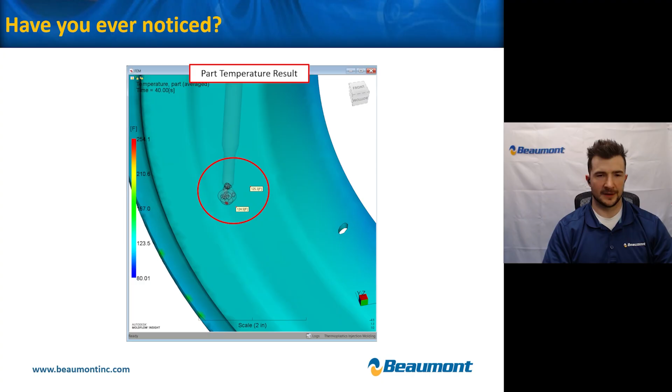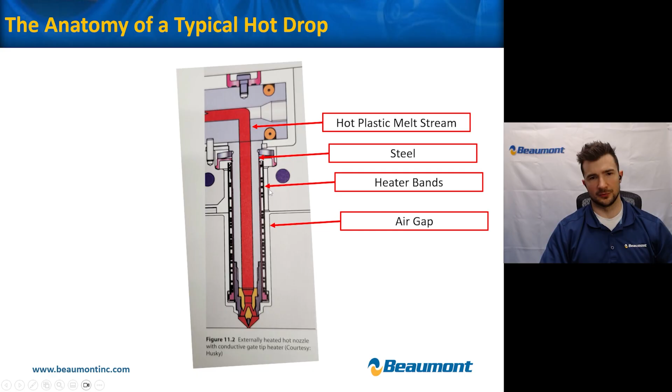So if we look at the anatomy of a typical hot drop, we've got this cross section here taken from one of our Beaumont books that John Beaumont's written. We've got the hot plastic melt stream there in red, encased in steel, and then surrounded by these heater bands. In this configuration, this is an externally heated hot nozzle, which is probably the most common configuration. There are some different options, but around that heater band, we have this air gap. So that's going to be really critical in understanding Moldflow's assumptions about the heat from this manifold and why it may or may not be considered.

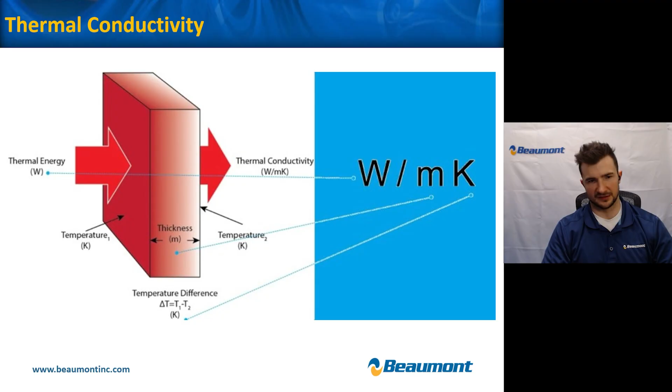So we have this air gap, and let's get into a little bit of background about thermal conductivity, air versus steel, and why these assumptions are being made. So if we look at thermal conductivity, we look at the units of that, it's watts per meter Kelvin. So what that's basically telling us is how much energy in watts is being transferred through a thickness in meters per a given temperature delta across the medium. So you've got a difference in temperature, which allows for heat transfer. You've got some thickness of material, and you've got how much energy is being transferred.

Now, the most important thing is to compare the thermal conductivity of air versus steel to understand why these assumptions are being made. So if we look at P20 steel, thermal conductivity of 29 watts per meter Kelvin, air 0.02 watts per meter Kelvin. So P20 steel is 1,450 times more conductive than air. So in comparison, air is practically a perfect insulator. It doesn't really transfer much heat relative to the P20 steel.

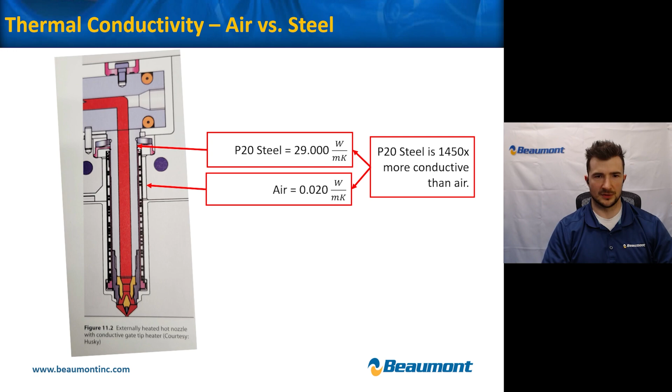So by default, given these conditions, Moldflow assumes that the hot gate and runner are insulated with a constant flux of 10 watts per meter squared. So flux is just a measure of how much heat is being transferred. So watts per meter squared. So how much energy per given area.

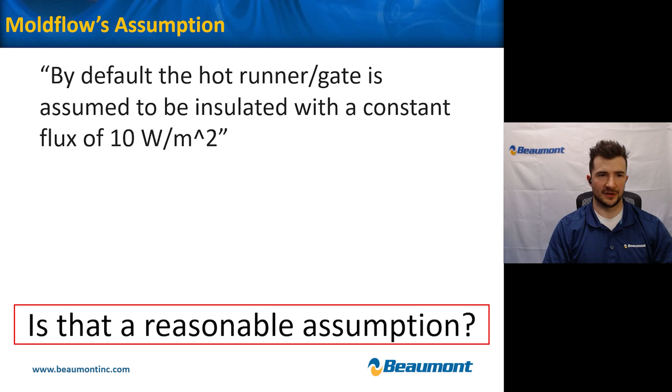So the question is, is that a reasonable assumption? Is it reasonable to assume that basically all of the heat from the hot manifold is insulated from the mold? And can we affect results if we dig into this a little bit deeper? So we need to look at some heat fluxes here to get a sense of what heat transfer is like in a couple different scenarios.

So if we look at the first image here, from the hot manifold into the surrounding steel, we've got that 10 watts per meter squared number that we discussed. So that's what Moldflow is assuming how much heat is being transferred from that hot drop into the surrounding steel. Now, if we compare the plastic part in the mold cavity to steel, we've got 9,770 watts per meter squared. So 977 times the heat flux.

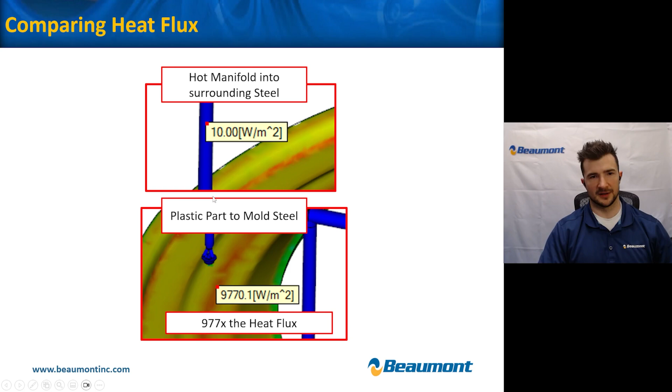So the plastic is putting a lot of heat energy into the mold steel in the areas that aren't considered insulated, but relative to the hot manifold system with that 10 watts per meter squared assumption, of course, it's a lot higher heat. So the question is, what about the gate?

So if we look at that same cross section of an externally heated hot nozzle, we see that air gap coming down, but eventually we see that that actually stops and we have hot plastic making contact with steel. So the question is, doesn't that put some heat energy into the mold? Isn't that going to heat that steel in that area? And shouldn't we see that in some of the cooling results or simulation? And if we do get a hold of that heat, does that affect our results? Does it affect warpage? In particular, does that affect cycle times within simulation?

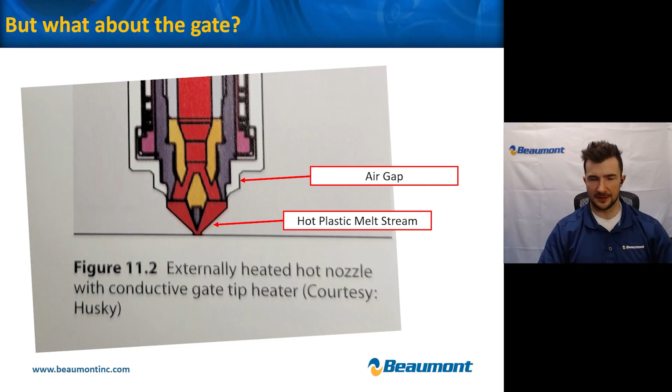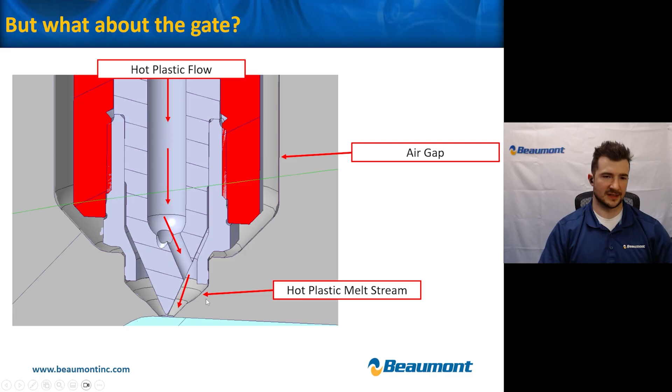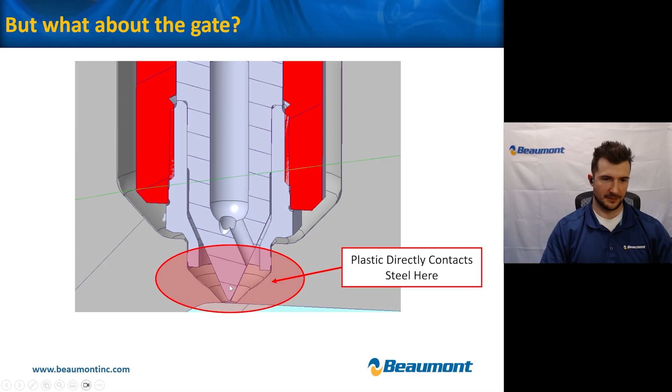Let's take a look at a cross section from an actual 3D mold here instead of just some textbook stuff. We'll see again, you've got hot plastic making direct contact with the steel. I've traced out the hot manifold channel with this sort of split ported tip, and you can see that that hot plastic is making contact with that steel at that gate. The air gap is over here, but the gate itself is making some contact with the steel. Just another view here highlighting that area that I'm talking about. So all of this hot plastic is close to steel, making contact with steel, and should be transferring heat.

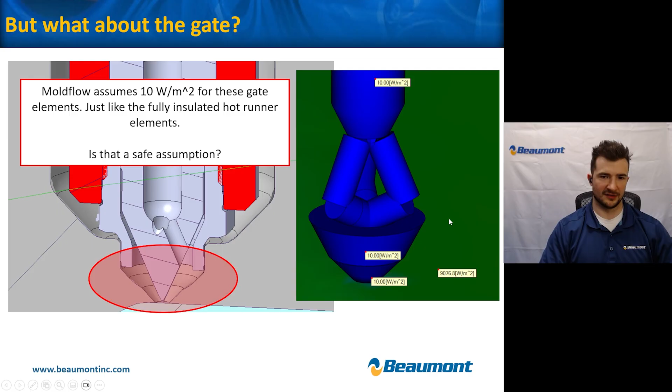Again, just to reiterate, Moldflow is assuming 10 watts per meter squared for these gate elements, just like the fully insulated hot runner element. So over here on the right, you can see those heat fluxes from a default Moldflow simulation, and it's just 10, 10, 10 all the way down. And then the part, of course, instantly cranks up to 9,077. The question is, is it a safe assumption?

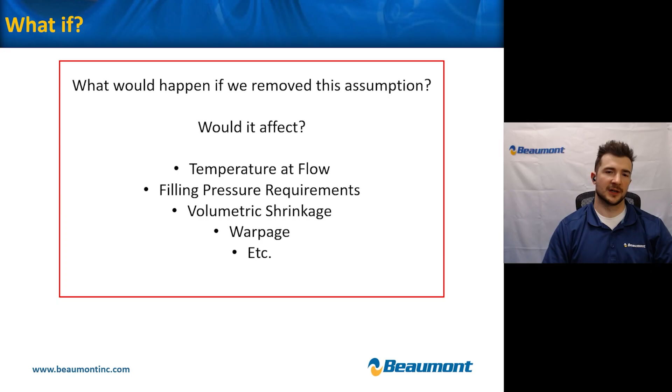So what would happen if we remove this assumption? Would it affect temperature of flow front? Would pressures be affected? Volumetric shrinkage, warpage, and others. There's a lot of different things that it could affect when you have possibly a significant change in heat profile within an area of this mold cavity.

So let's get into a case study here. Just a little bit of background on process and material. This is polypropylene material. The process details themselves are not super important, but just a little bit of background. Melt temp 420, pretty typical for polypropylene. Water temperatures, a little bit of differential water here. A side 80, B side 100 degrees Fahrenheit, and pretty typical temperatures for polypropylene again.

Injection time 4.2 seconds, switching over at 98% full cavity. Packing with 5,000 psi for 30 seconds, cooling for 6 seconds. Part solidifies at 38 seconds, and total cycle time 40 seconds. And another point to make here is that it is a glass fiber filled material.

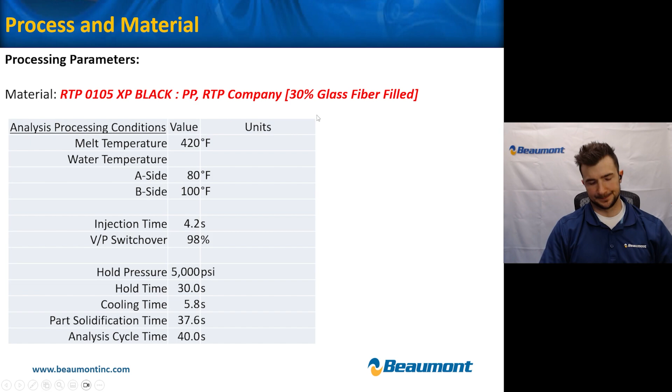So if we look at a cross section through the mold, I'm just showing that this is actually a 3D FEM mold mesh. So we've meshed the entire mold cavity with 3D elements to try and do our best to capture this effect.

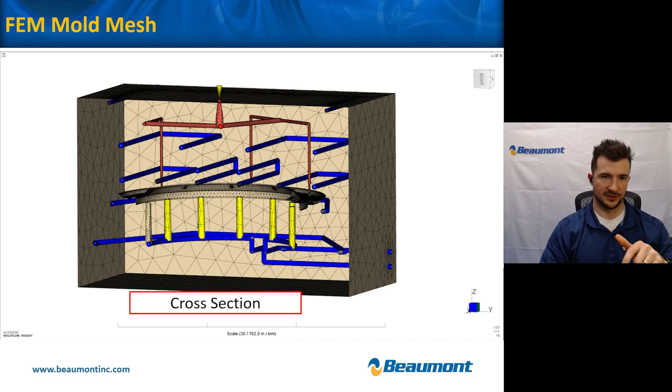All right, so now we're going to get into how we can manipulate some of these parameters to try and capture the heat flux from that hot gate. So if we look at the default hot gate property here, we can see these heat loss into mold options. And by default, it's set to automatic, which gives a constant flux of, again, that 10 watts per meter squared.

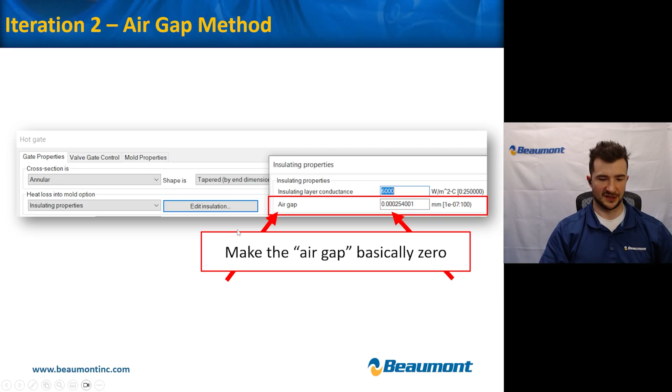So one method to change this insulating property and allow some of the heat from that hot gate to actually make it into the mold steel is to change this heat loss into mold property to insulating properties, edit the insulation, and put in this air gap value and basically make it zero. So this is 0.00025. You're just making it extremely small. So you're basically saying it's effectively like steel on steel contact at that point, plastic on steel contact at that point.

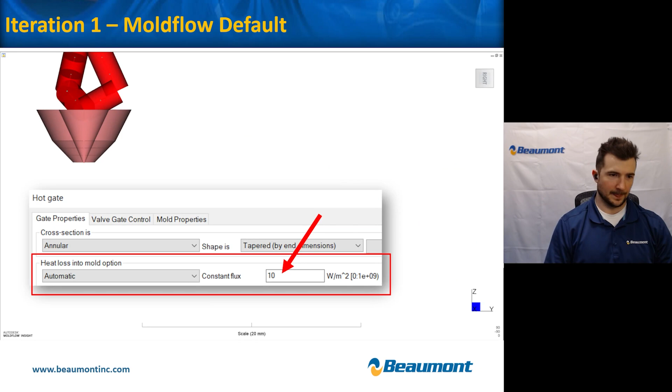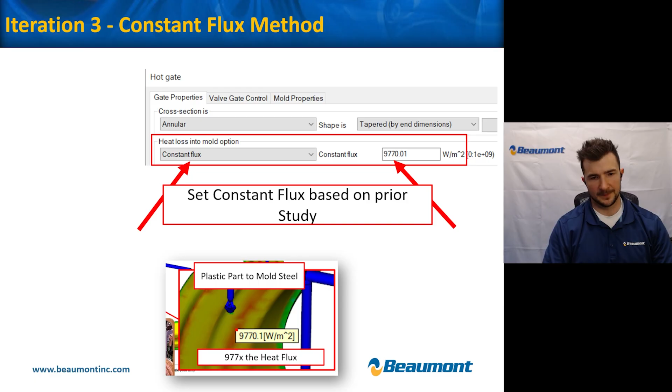The other method I was curious about was to do this constant flux method. So taking that heat loss into mold, changing it from automatic or insulating properties and making it constant flux and grabbing that flux from some reference data. So you'll have to run a preliminary cooling analysis to see what kind of flux you get from the part to the mold steel, which in this case was 9,770, and input that into the hot gate.

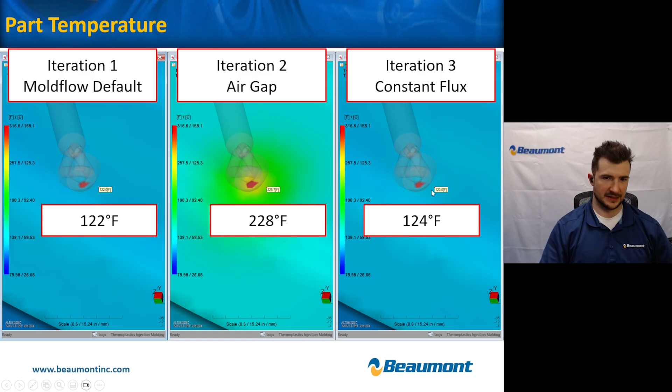So you see more yellow, more red, more dark green here with iteration two, and magnitudes there about 228 degrees Fahrenheit, just selecting a point, compared to 122 degrees Fahrenheit for iteration one. So almost double the mold temperature around that hot gate. So we're actually picking up on that heat transfer. Iteration three, only a couple degrees Fahrenheit. So that particular flux doesn't seem to be enough to really give us the type of heat that we might be expecting from that gate.

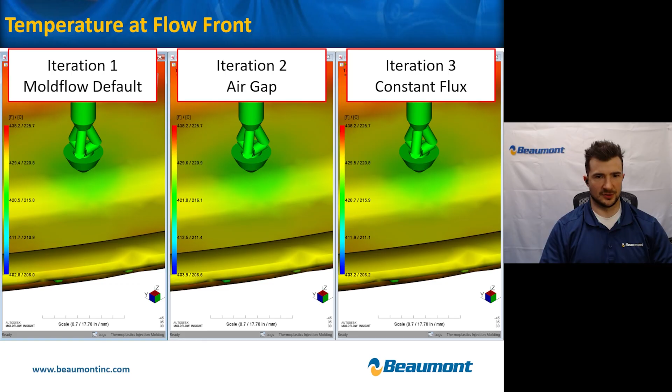Now, here's where things start to get interesting. If we look at average volumetric shrinkage, we'll note that iteration two starts to show significantly higher volumetric shrinkage around that gate. You can see again the color distribution. We've got a higher amount of greens and dark reds around that gate and just a different trend overall. And we're definitely picking up on some elevated shrinkage, which is what we would expect because the mold's a lot hotter there. The question is, is it going to affect the warpage?

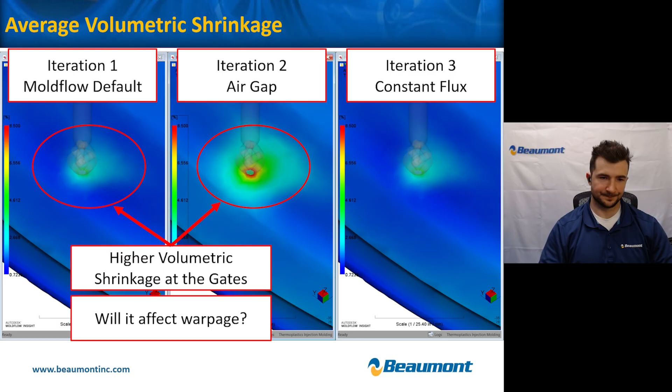Getting into the warpage results here. So we have iteration one looking at -2 millimeters in the dark blue versus iteration two, where we're at -1.8 millimeters. So overall trend is very similar. You can kind of see the same kind of color pattern. Iteration three, we already know isn't really doing much to give us that heat, so we're not as interested in those results at this point. But with iteration two, we are definitely seeing some change to the warpage magnitudes, actually a little bit less warpage on the outside of the part there. So it's an interesting result.

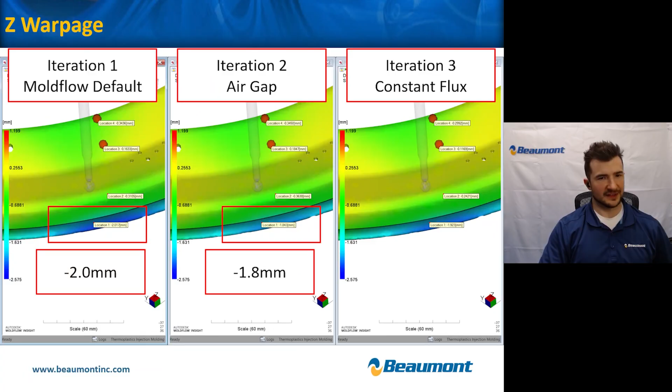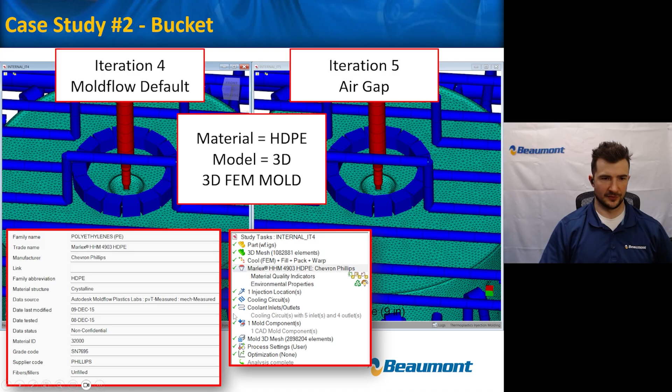So that's just one example. I wanted to go ahead and run a couple more studies and see if we could get more significant differences in different case studies. So here's case study number two, which I'll call iteration four and iteration five. Again, Moldflow default on the left and now just looking at that air gap method on the right. In this case, the model's material is high density polyethylene, got a 3D tetrahedral part mesh, and again, the 3D FEM mold on this particular example, which is basically the top of a bucket style part. So again, just some additional material details. It's a high quality material file with fully measured PVT and mechanicals.

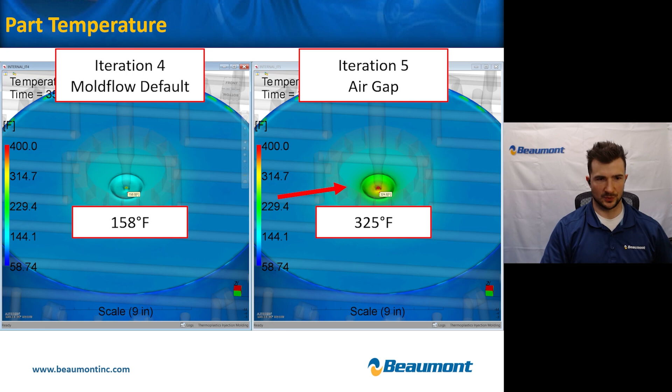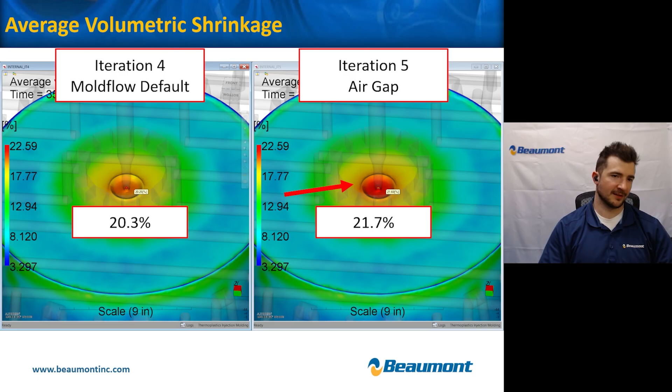Jumping right into some results, again, looking at part temperature here. Again, you see a significant increase in part temperatures associated with that air gap methodology from 158 to 325 degrees Fahrenheit. So again, almost double. And clearly, color distribution around that entire drop has changed. You're getting an actual heat concentration, which is what we would expect. Temperature at flow front, again, not a big change here, not that interesting. But again, looking at volumetric shrinkage here, we've gone from kind of a nominal yellow to all dark red around that center gate, 20.3% versus 21.7%. So we've seen about 1.5% increase in local volumetric shrinkage.

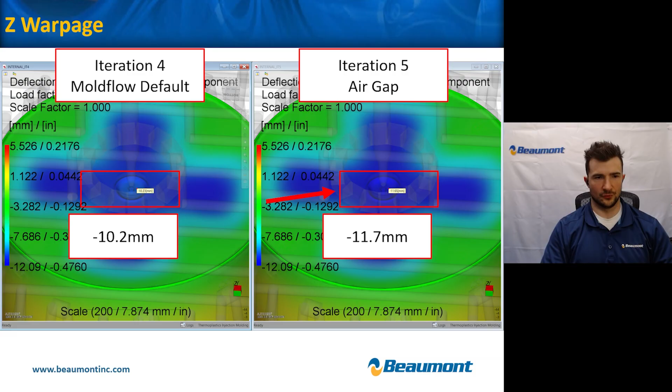Let's get into another case study here. Again, iteration 4 on the left is the default, iteration 5 on the right is the air gap method. And we're looking at the snuff can lid. So this is like if you picture a can of Copenhagen or something, it's got that little plastic lid. This is that lid. So relatively small part.

What I wanted to do was look at a relatively small part because those other two examples we looked at are kind of larger parts. And I figured the smaller the part is, the more that heat concentration from that gate is going to influence the total properties. So in this case, polypropylene material, 3D tetrahedral model again, and running beam cooling in this case. So not even doing the FEM mesh in this case. Curious to see with traditional beam cooling, could we still pick up on the same effect?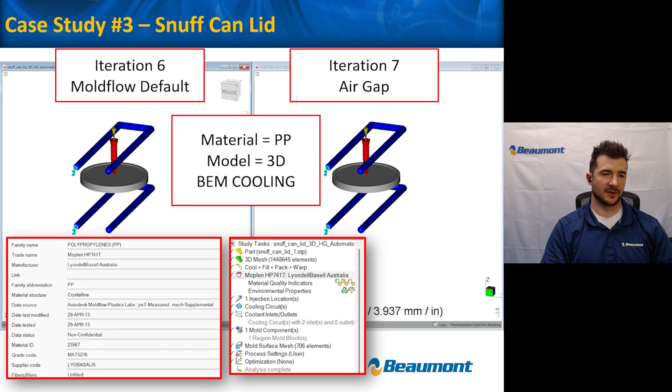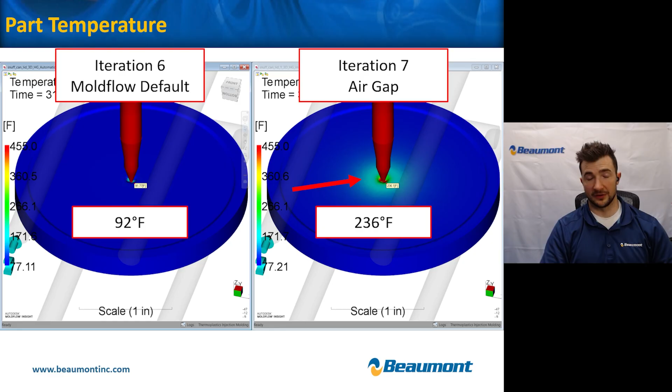And yeah, not really having any trouble picking up on that. You can see we've got 92 Fahrenheit on the left versus 236 on the right, more than double in this case. So we're getting a lot of heat concentration around that gate, as we would expect. Temperature flow front, again, no big difference there. But volumetric shrinkage starts to get very interesting. We've got 2.8% versus 4.1% on the right.

And overall trends are just very different. You've got this all kind of nominal teal color for iteration 6, but for iteration 7, we've got a big dark green circle in the center of the part, a big dark red eye right at the gate, so getting a lot more volumetric shrinkage through the center of that part. Magnitude's a lot different, 2.8% versus 4.1%. So we're seeing some big differences on this one, which is, like I said, what I would expect for smaller parts.

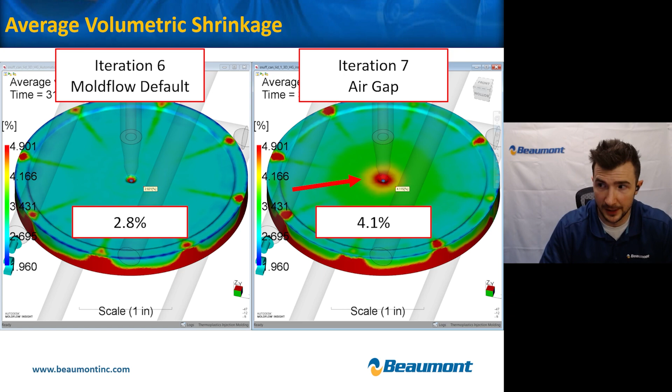Finally, looking at Z warpage on this, you can see iteration 6 on the left, the default assumption, we're getting practically zero warpage. I mean, 0.02 millimeters in the center there, 0 millimeters on the outside. So basically no warpage to speak of. But once we account for the heat from that drop, we see negative 0.5 millimeters in the center of the part and negative 0.11 on the outside of the part.

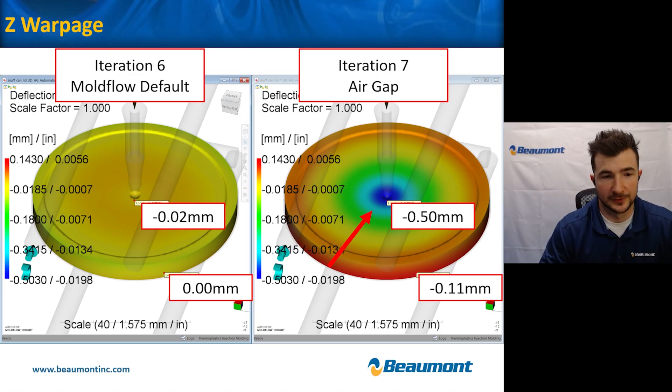So we actually start to see some differences in warpage in the part and actually pick up on warpage of the part. So here's an example where you simply wouldn't see this warpage at all had you not accounted for the heat from that gate. So it can definitely make a big difference. And this is a really good example of that.

Now I'm looking at this a little bit differently. I've flipped the part around and I've introduced a scaling factor to kind of exaggerate the warpage trend. And you can see that on the left, basically, you don't really see any deflection at all. And on the right, you see a big bowing out in the center of the part there. It's scale times 10, so it's exaggerated, but it just makes the point that we're actually picking up on some warpage with this methodology.

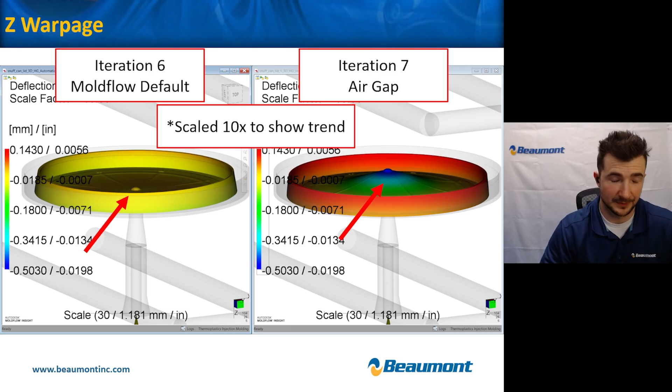Now, there is some future work to be done. The best thing to do would be to do a real world correlation study, measure some actual mold steel temperatures and compare to simulation outputs. So, run a probe on the actual mold steel and compare those outputs to simulation. Transient simulations, so looking at not just cycle average as is the default with Moldflow, but looking at transient cooling across the cycle and perhaps even multi-cycle transient simulations to see if this heat is building up over time, is that going to further affect the warpage and really make a big difference?

Full 3D tetrahedral hot runner versus beam. So these studies were all done with beam hot runners, but it'd be interesting to see for a full 3D hot runner model at tetrahedrals. Would it make more of a difference? How would that affect things? Buckling warpage analysis, be interesting to do some eigenvalue comparisons between using this factor and not. And just other materials, just running a variety of different materials on a variety of different parts, more correlation.

And lastly, just more simulations and correlating to actual warpage. All the situations where Moldflow maybe wasn't correlating exactly with the warpage trend, let's introduce this factor and see if that improves the results and see if that actually gets us better correlation. So I think there's definitely some studies out there where these effects were missed and possibly leading to inferior simulation results.